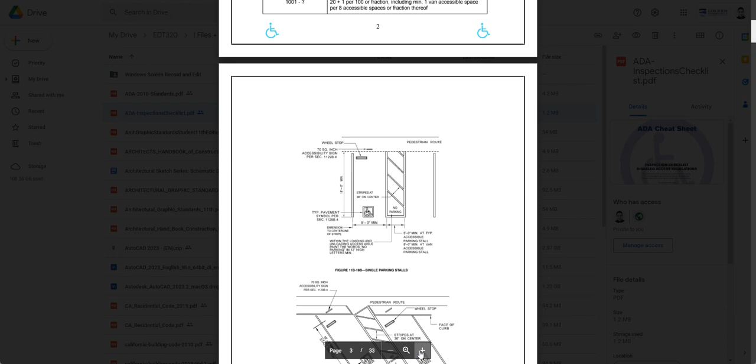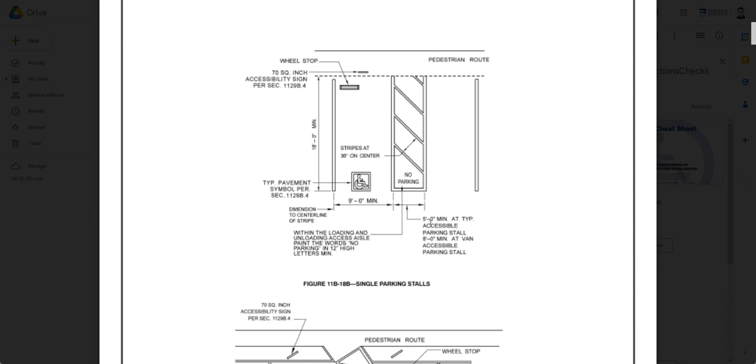But if you look at this one here, the diagram over here says a van accessible parking can be 9 feet and 5 feet here, which is right. This is still correct, but one of them should be van accessible. Okay, so this other parking over here, if it's van accessible, cannot be 9 feet. It has to be 11 feet to accommodate a 5 feet. So if there's two van accessibles, this wouldn't work. This has probably been revised.

The best way is to go to your California building codes because they have widely adopted the Americans with Disabilities Act in terms of design under Chapter 11. The first one is housing accessibility, and the other one is accessibility for public buildings. So what we're concerned with right now is the accessibility on public buildings. And if you go through them, they give the same language as the Americans with Disabilities Act, because it has been largely adopted here.

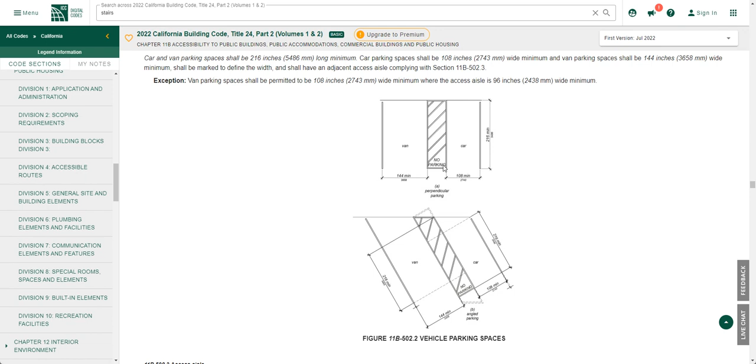We adopted the entire chapter of the ADA, okay, and it's been widely addressed here. So if you look at that site plan that we have, general site and building elements, you can see now that if you have disabled parking, one of them must be van accessible, and if it's van accessible, then it's supposed to be 144 inches minimum with a 5 foot aisle. Okay, so most of these have been addressed here in the building code.

So you don't need to open any other building code book, but there are books out there, even websites, that are really geared to the Americans with Disabilities Act.

So if you search ADA, one of them is this website, which is a relatively new website. This one has just been launched, and I don't think it has all of the disability accommodations in terms of building code or requirements, which is public accommodation, or ADA standards for accessible design.

When you click that, there are these two PDFs that they've created. They just haven't uploaded them on their website. If you click here, there are topics here, and they're still working on it, but they did release standards for accessible design out of these two books. The Disabilities Act was revised last in 2010.

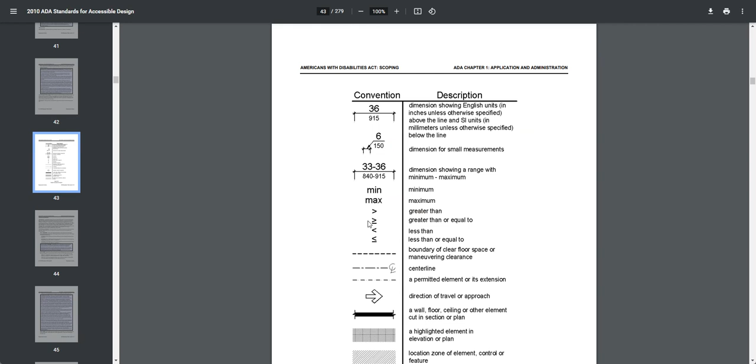So the ADA does not just talk about design; it talks about also postings, colors, heights of letters, and all that other stuff, signage. So we're not just going to talk about parking. It also will talk about the signage that you can find in parking lots, the color of those signage, the height of the text, and everything like that.

And it could be as small as a change in elevation of the floor. So if you have a carpet pile, that carpet pile cannot be higher than half an inch. So even small things are listed there. If you have grates or openings, the opening on a grate or metal cover cannot be wider than half an inch. And the grates must be perpendicular to the dominant travel direction.

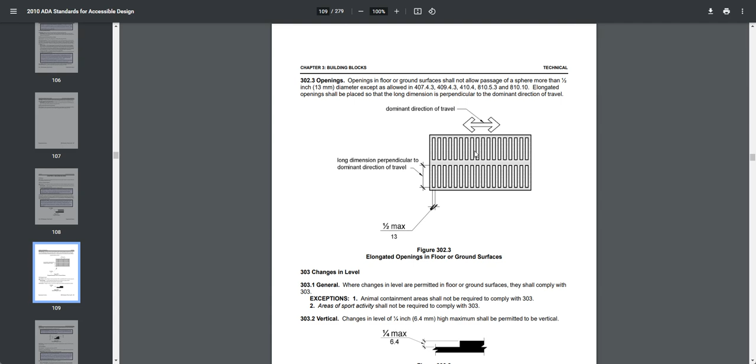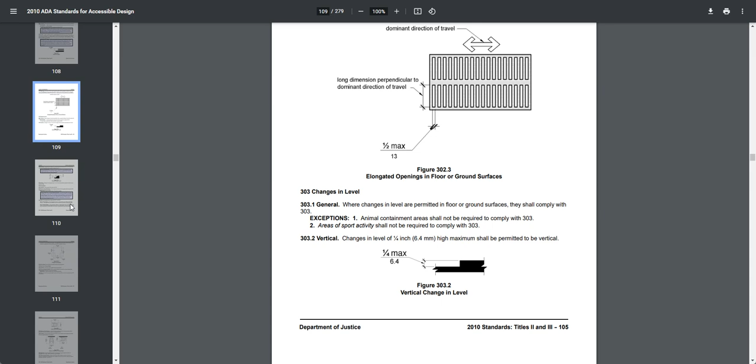If there is a change in floor, let's say you decide to put a tile, then the difference between the lower side and the top of the tile can only be a quarter inch max. So they do address those little things. If you can't do it with just a quarter and you have a higher change in height, you do have to make sort of a small ramp or bevel the edge. So if you have a half an inch difference, then you have to bevel the change. And I think the half an inch is the max with the bevel.

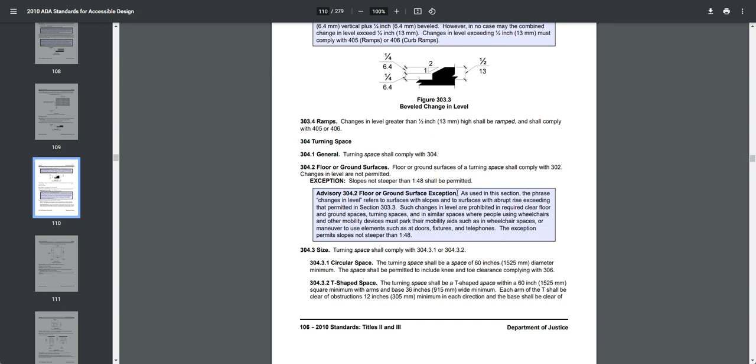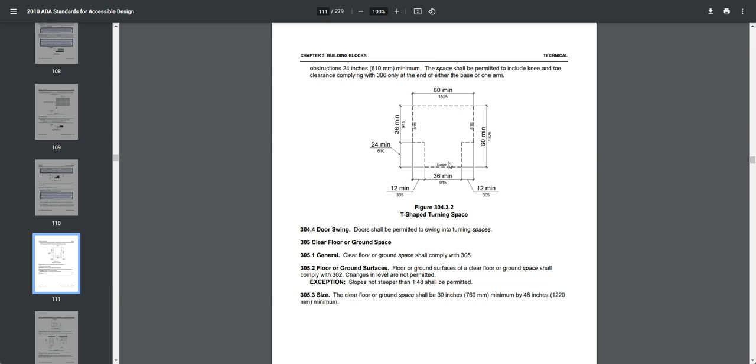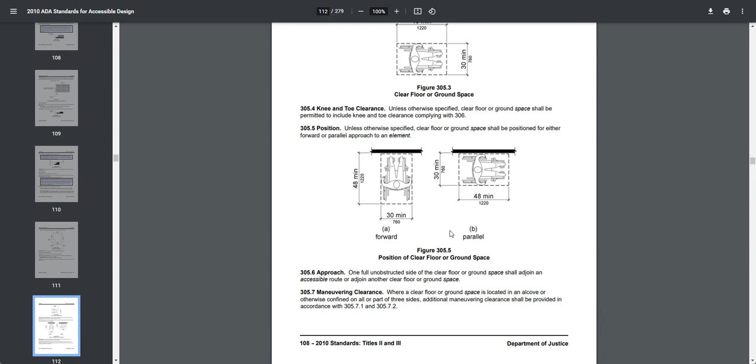Okay. Turning space for people in wheelchairs is defined in the ADA. So for people in wheelchairs, the space that they occupy is defined as 30 by 48. So if you will design something for people in wheelchairs, like counters, there should be a space for them, and that should be the clear space for them.

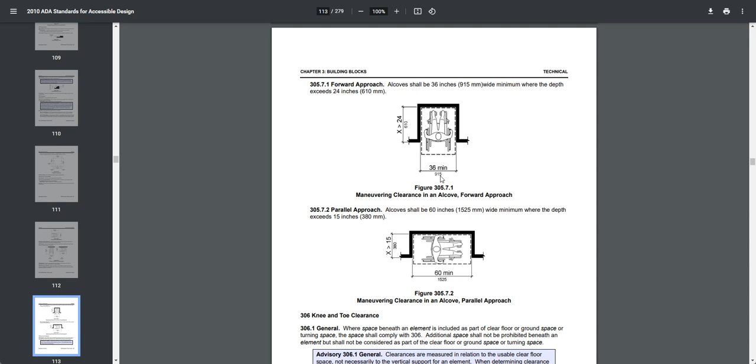If you have a nook or an alcove, sometimes where you have a phone booth, which doesn't really exist anymore, or if you put a drinking fountain in an alcove because you don't want a drinking fountain to stick out of the wall, that alcove must accommodate a person in a wheelchair that's perpendicular or parallel to that alcove. Okay, so there's a lot more here.

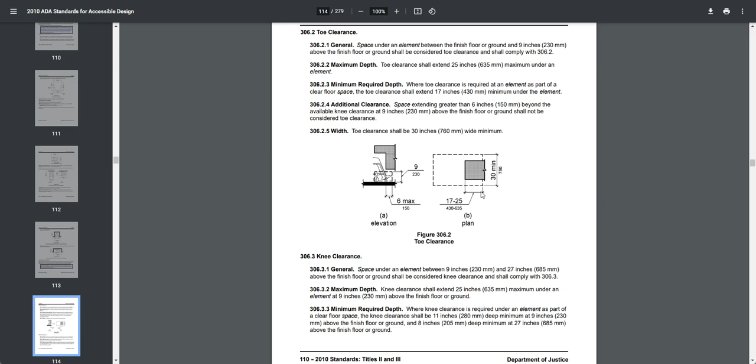You can see that this is the space for the foot of the person in the wheelchair. It must clear a height of 9 inches and 6 inches. So if this was the drinking fountain, it can only stick out 17 to 25 inches from the space provided for the disabled person. Okay, so as you can see, this is what we have here.

You cannot have the bottom of that counter, if it's projecting, be lower than 27 inches. Otherwise, the person's knee will not fit. Okay, those other stuff.

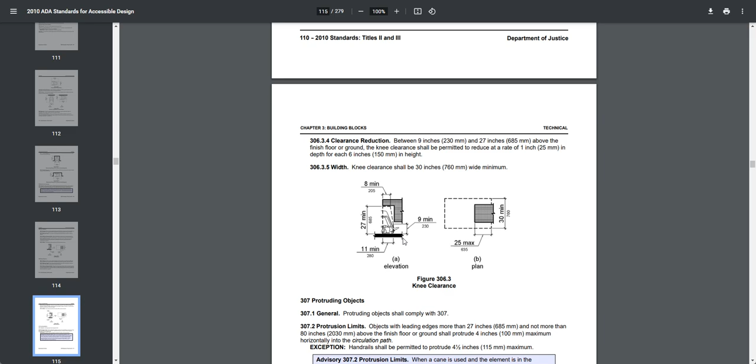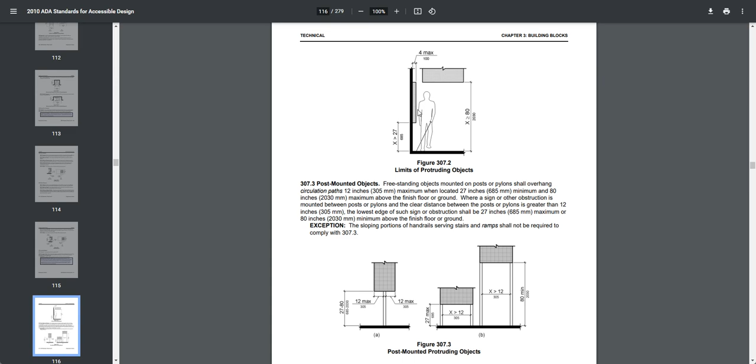Blind people with canes: if they are walking in a corridor, anything that projects, like display cases, picture frames, stuff like that, has a maximum of 4 inches to project, because blind people with canes can't see and might hit that projection. So a 4-inch projection is the max allowed.

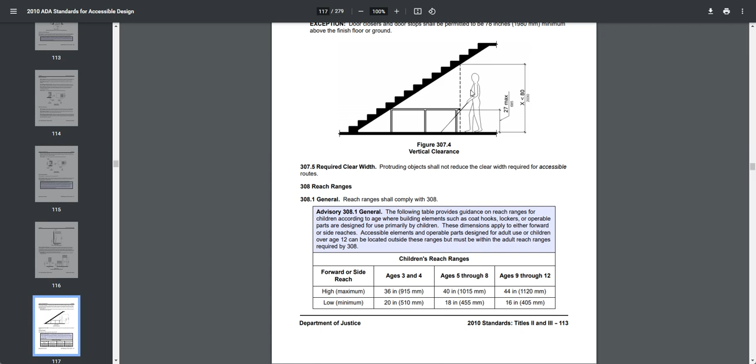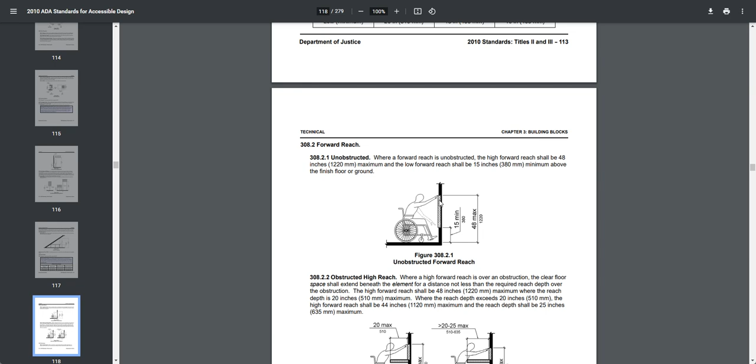That other stuff, you know, you will see some stairs with these metal barriers on them, and that's to stop blind people from hitting their head underneath the stairs. So there's a lot of things addressed here. Heights of buttons or things that need to be pressed or accessed. ATM machines, the buttons must be a particular height, 48-inch max, because people in wheelchairs, if it's higher than 48 inches, they cannot reach it.

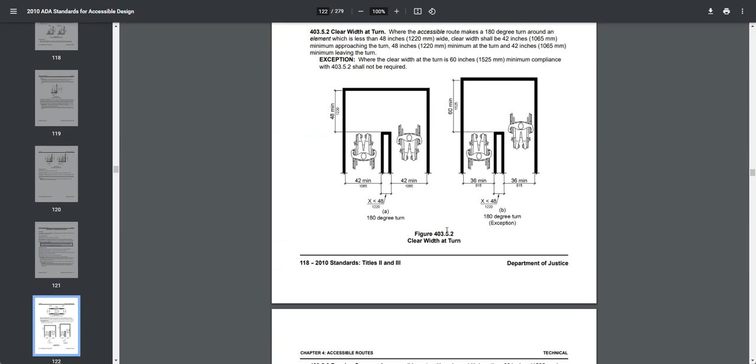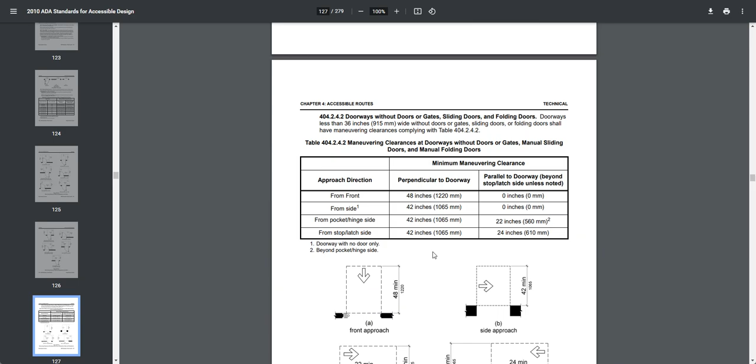Okay, so a lot of things that you think are small, but it's definitely designed to accommodate people with disabilities. Okay, doors must have a certain width, and we've discussed that on the schematic plan, because you have to plan for them. Because that's the reality. Okay, so it's not just parking; it could even be the slope to the sidewalk. You have to have a slope that meets a certain angle or percentage. Okay,

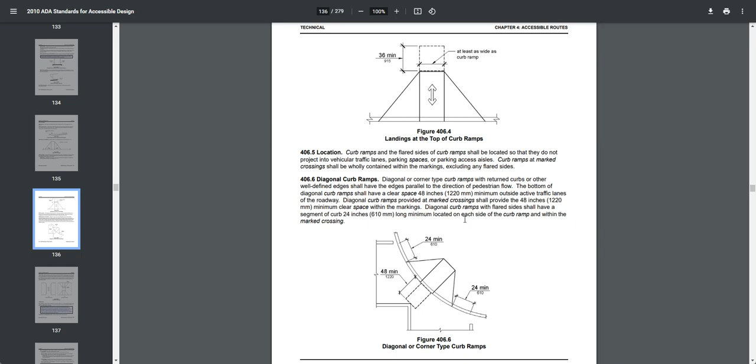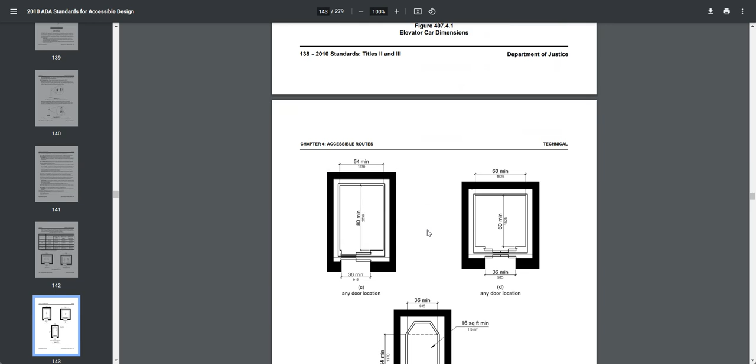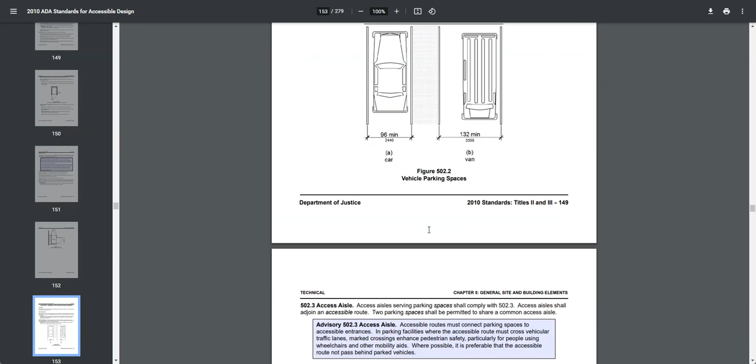so it is extensive, including signage that has to have braille, and the letters must be raised with certain heights. Okay, elevators we've talked about in our schematic floor plan lecture. There's a lot more that's in this one. Parking again. So this is more up to date because this was released by the government.

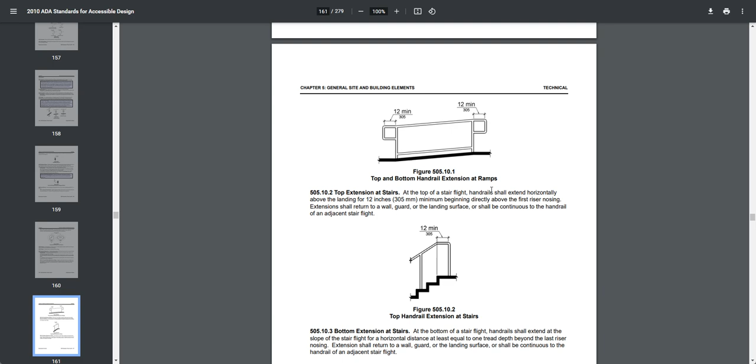Later on, we're going to have to put handrails in our stairs, and the handrails have to meet ADA code. Okay, the space must have a minimum of 1.5 from the wall sticking out, and it must have a particular height, and the shape must also be either a rounded shape or an ellipse for the handrail. Okay, so handrails, you cannot just make any handrail that you want. It's governed here. It must stick out 12 inches beyond the last step of a ramp, or the edge of a ramp, or last step of the stair.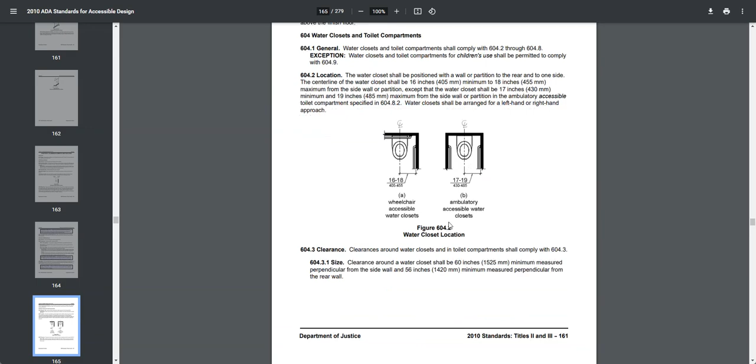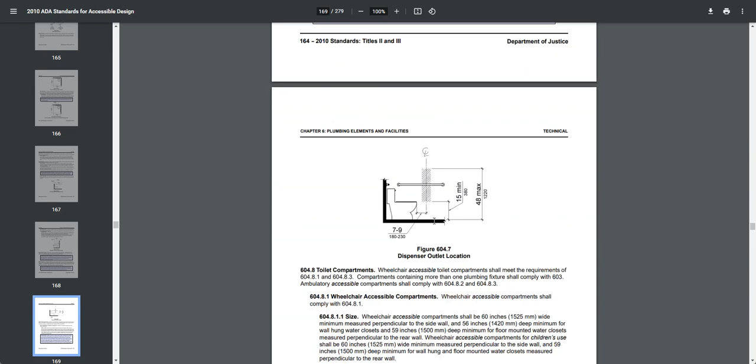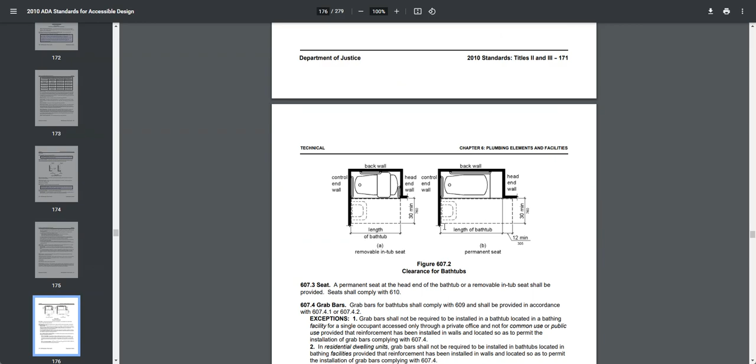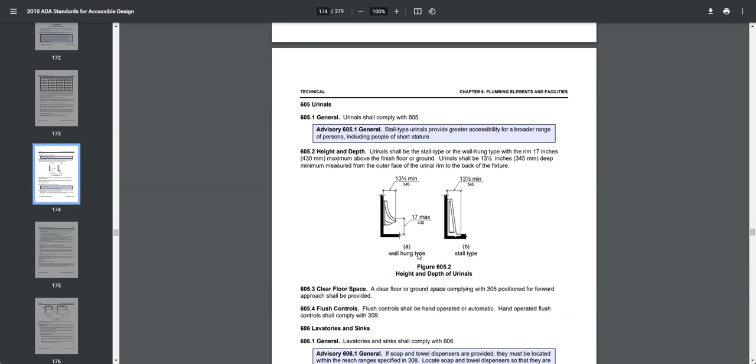Yeah, there's a lot more. Here's plumbing, drinking fountains, and stuff like that. Restrooms, closets, water closets. In fact, on your project, you will have to provide restrooms, and I know there's two restrooms, and those restrooms must fit the ADA requirements. And typically, the ADA requirements state the size or the required turning radius inside of a restroom. If there's any urinals up here, right, it has to fit this description or these requirements of the ADA. It hasn't really changed. This portion hasn't really changed much.

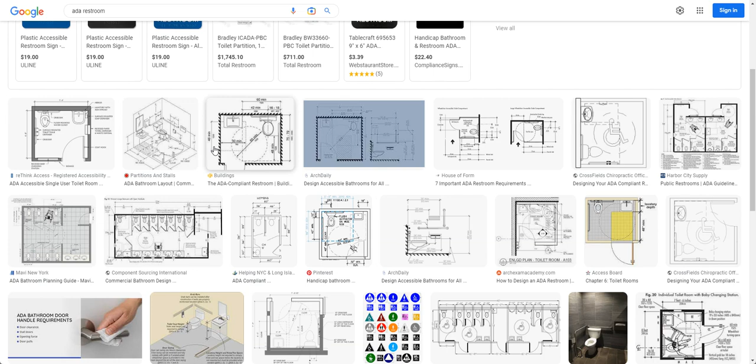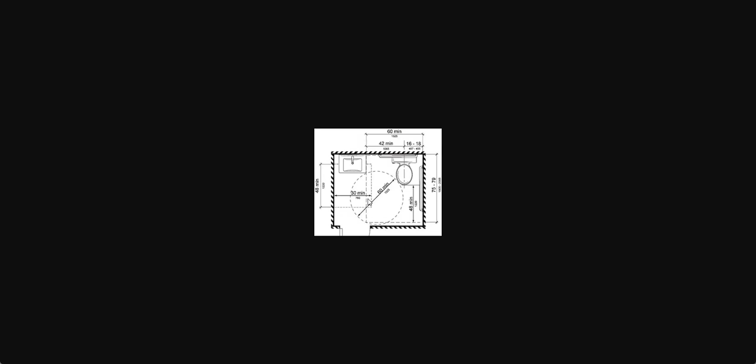In particular, the restroom. So, in fact, if you open up a new tab and type in ADA restroom and go to images, there you can see a lot of these restrooms have been solved or previously done before, and you will have to create a detail of this restroom later on. Okay, so you would have to actually make sure that there is a 5 foot turning radius. Let's click on this one. 5 foot turning radius. Maybe we can open this bigger. Open image in new tab. There you go. Whoop. It's still small. Anyway, see if I can.

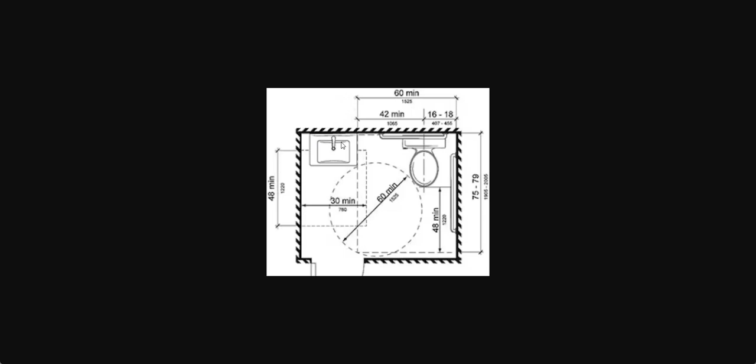The center line of the water closet must be 16 to 18 inches away from the edge, and always, when you go to a public restroom in a school or university, you're gonna see these grab bars, and they're dictated here. People in wheelchairs should be able to turn around, and that's why there's this circle that's 60 inches minimum. Then you have that space underneath the sink that's supposed to accommodate people in a wheelchair. That's a clear 30-inch space. So you don't need to reinvent the wheel, because you have sizes now that you can see that fit the ADA requirements.

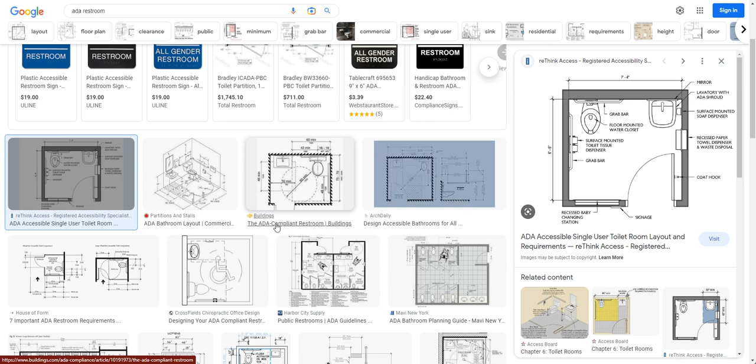Now the door, if it opens, then you need to make sure that the swing doesn't overlap with the 5 foot turning radius by a certain amount. Okay, you can overlap them, but only by a certain percentage. So it's definitely better to have the door swing out of the restrooms instead of swinging in, because there's another requirement on that one. Okay.

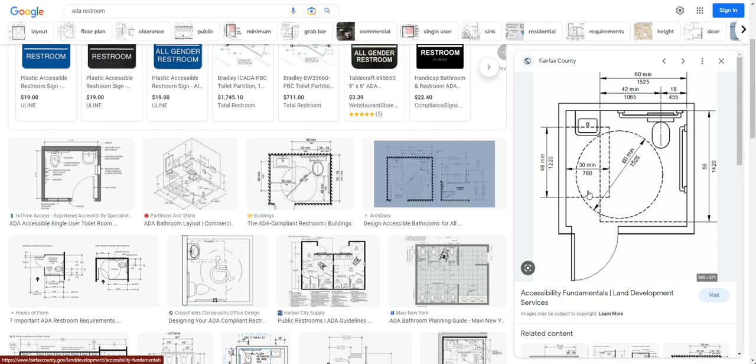Yeah, so it's given here. You got different sizes. You don't need to reinvent the wheel. You can find out. You just have to make sure of these little things, see this, the overlap. If you do want to swing the door in, the maximum overlap is 12 inches. Bigger overlap is not allowed anymore.

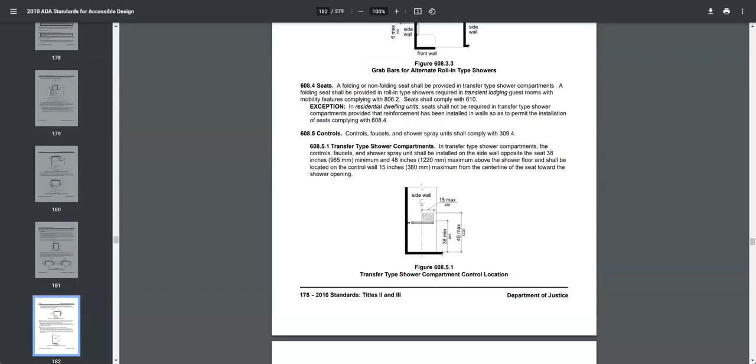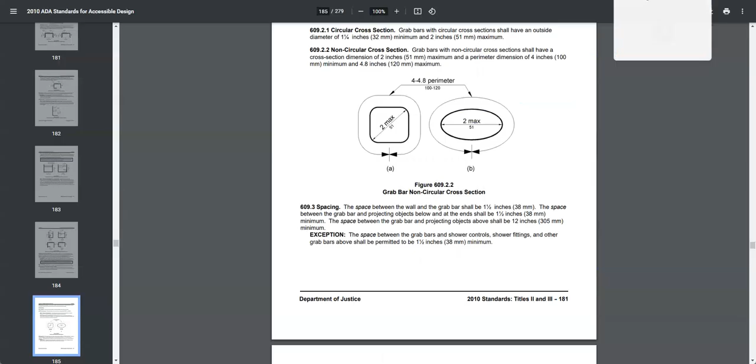Okay, so yeah, don't reinvent the wheel. You can search for it. You can find this PDF on the ADA website here. Maybe I could just provide a link for you on our module, so you can access these documents directly without really finding them yourself. And there's a lot.

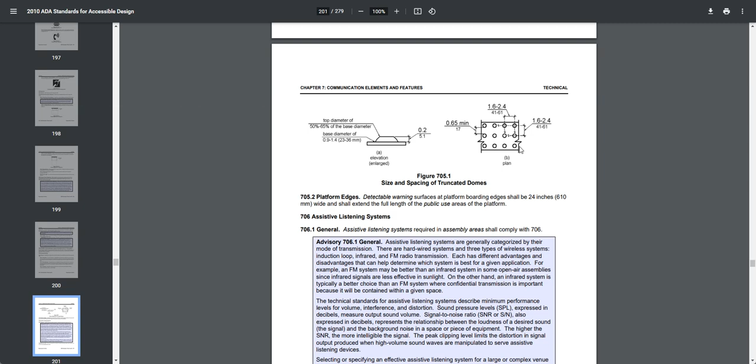Sometimes you'll see on parking lots, or like if you go to Costco, when you cross the driveway in Costco, you're going to see bollards, and then you're going to see these yellow things on the ground that, when you roll over with your cart, just vibrate crazy, and that's your domes or truncated domes. And the reason why they're there is because of the Americans with Disabilities Act, where blind people should be able to know when they're crossing a driveway. When they cross a driveway, if they can't see, they can only feel. And when they step on those truncated domes, then they know that, oh, I'm crossing a driveway.

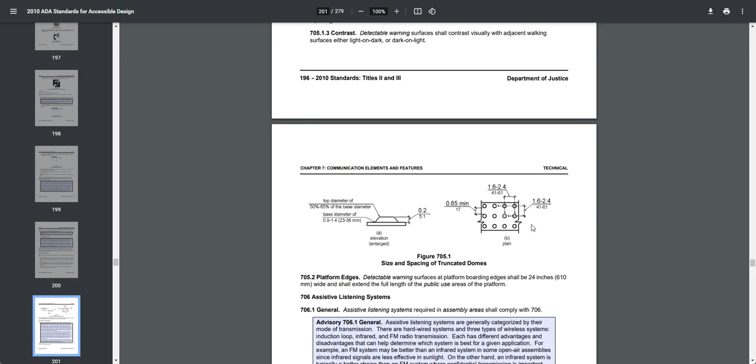You don't need domes if you have a raised curb, but just like in Costco, we don't have a raised curb. We just have a flat level so that people can cross anywhere and push their cart without going through a ramp. But in doing so, you need to provide a way for blind people to know that they're crossing a driveway, and that's where the truncated domes come in. Okay, so that was little stuff, and very very extensive.

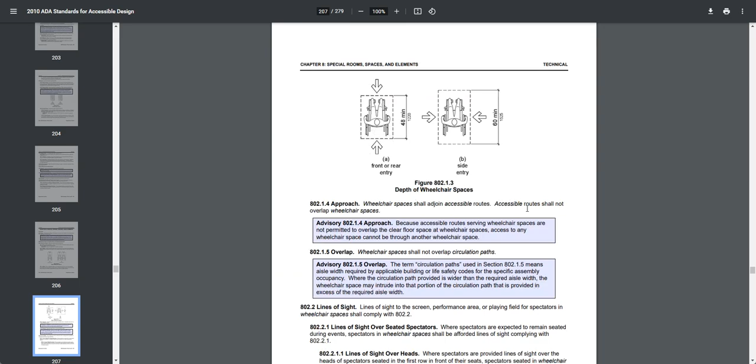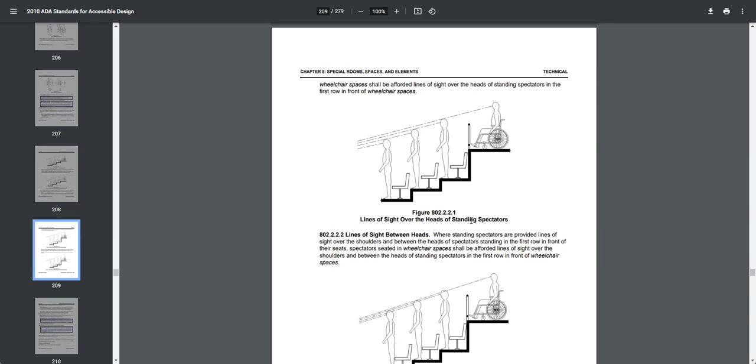You have a lot of information here, difference in heights in movie theaters. You would see that people in wheelchairs have their own spots, not because they need their own spot, but because they cannot see. If it's too low, then the heads of people will block their view. So those kind of things have been addressed, have been accommodated, in apartments too.

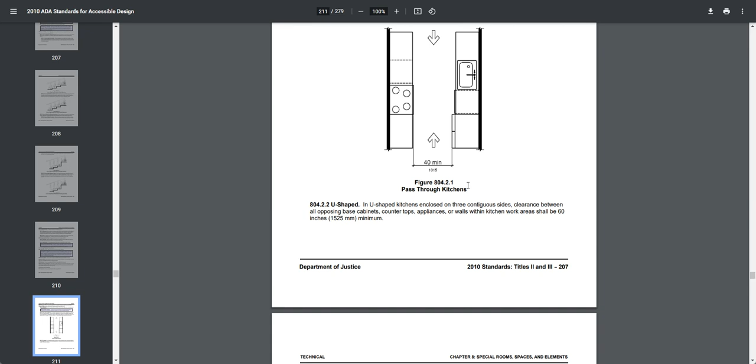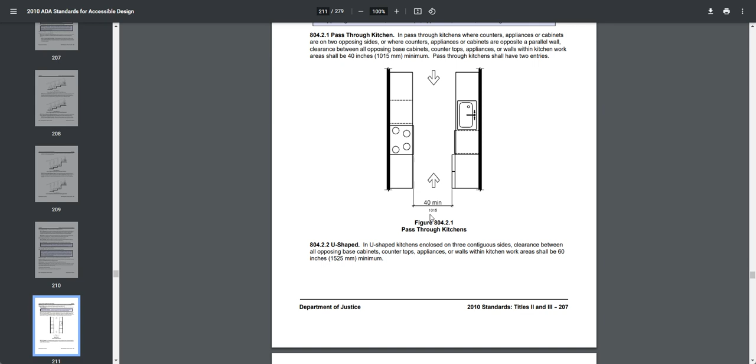The gap between appliance and cabinet or whatever must be 40 inches. So in an apartment building, there would be a percentage of the units that are open for ADA for people with disabilities, and those units have been designed specifically for people with disabilities, and they have to meet these requirements for the design of their kitchens and stuff like that. Okay, so very very extensive. It'll take us a lot more hours to discuss these things.

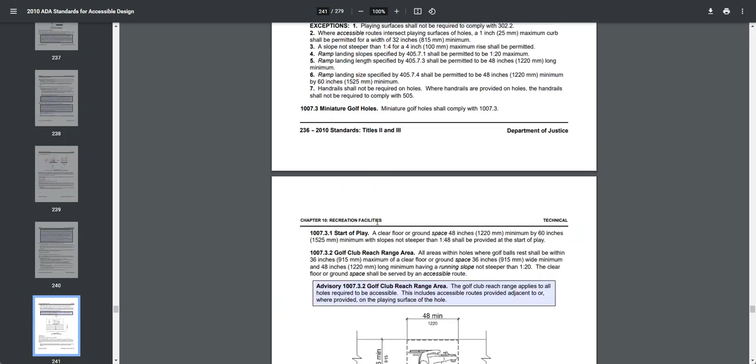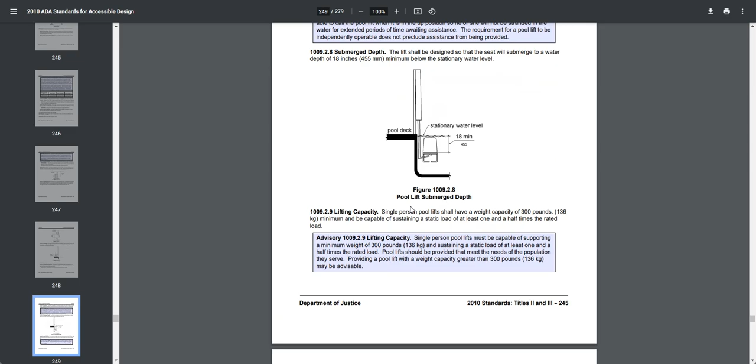So you can go through them, or you can access these whenever you bump into some situation. I certainly don't have all of them memorized, but just the common ones that are usually part of the design process, which is a site plan. So it's parking, sidewalks, handrails, ramps, doors. I don't really memorize them, but I know that there are requirements to them, and I just have to go back to the building code or to a document like this to see the impact of what I'm doing, if it meets ADA, because we need to be compliant. We don't want a lawsuit to happen to our client.

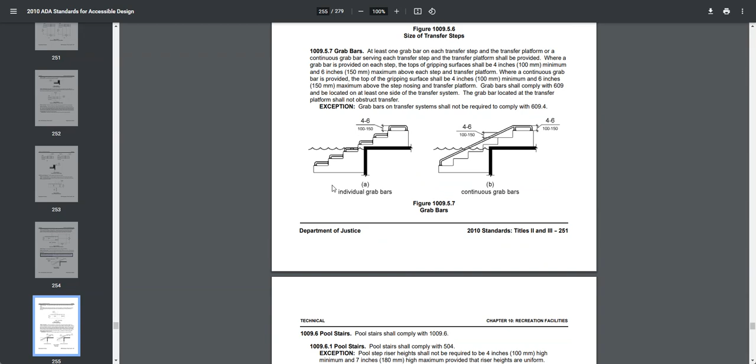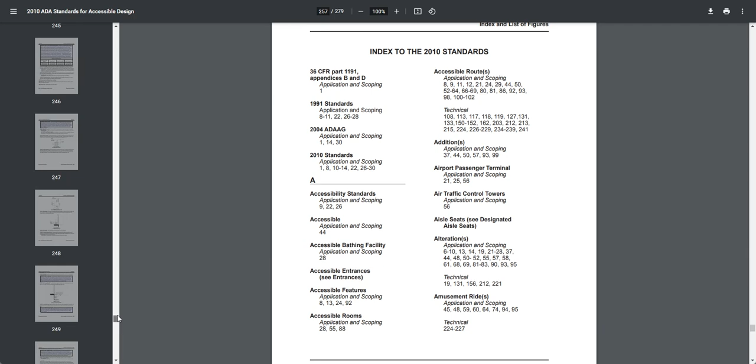And if it's a new building and he gets a lawsuit, guess what? He or she will drag the architect into that lawsuit. Say, hey, my architect, okay, that. So I didn't know. I was reliant on my architect's design, and so the architect has a lot of responsibility to make sure that the building meets ADA requirements in terms of accessibility.

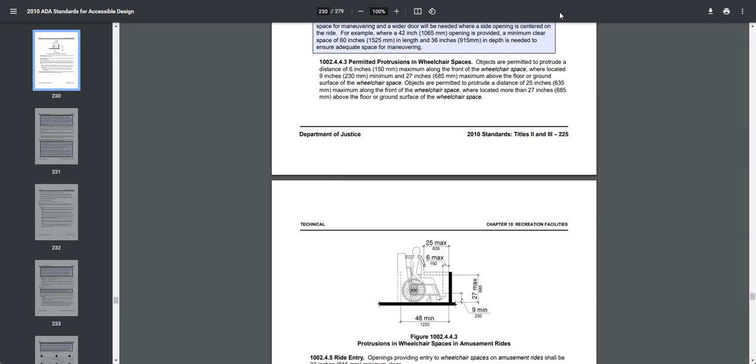Okay. Yeah. So I will leave this document as a link on our module, but you can also access them directly from the ada.gov website, and you simply have to go and click the link on the front page, ADA standards. You click that, and you're going to see these. Okay, so later on, when you submit your drawings done in AutoCAD, and we are reviewing them, we have to find those elements that need to be compliant with the ADA.